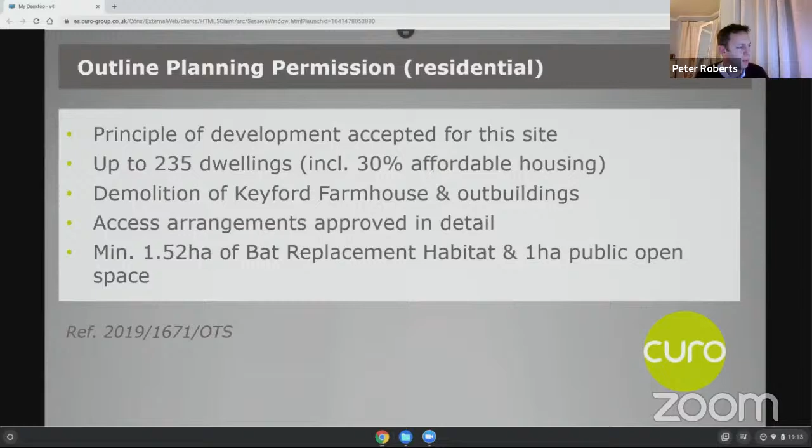In terms of our reserved matters, the original application was submitted in July 2021. The key elements of it remain unchanged - it's still for 198 new homes, including 30% affordable housing, and still for a mix of 1 and 2 bed apartments and 2 to 4 bed family homes.

It's still a lower density development than permitted through the outline - so 37 fewer homes than permitted through that outline planning permission.

You've just gone through reasons of concern that were expressed at the last meeting, so I won't reiterate those, but I'll come on to what we've done in response to those comments. We've taken a number of months to come back with a revised scheme. Over that period, we've been working quite closely with officers, and we've had significant feedback from the Civic Society, so we've really taken those comments on board, and they've influenced the revised proposals.

In terms of changes made, we've revised the elevations, we've revised the materials, we've provided additional information on levels, we've looked at the orientation of some plots around the northern basin in particular to improve overlooking, and we've enhanced the sustainability credentials of the scheme.

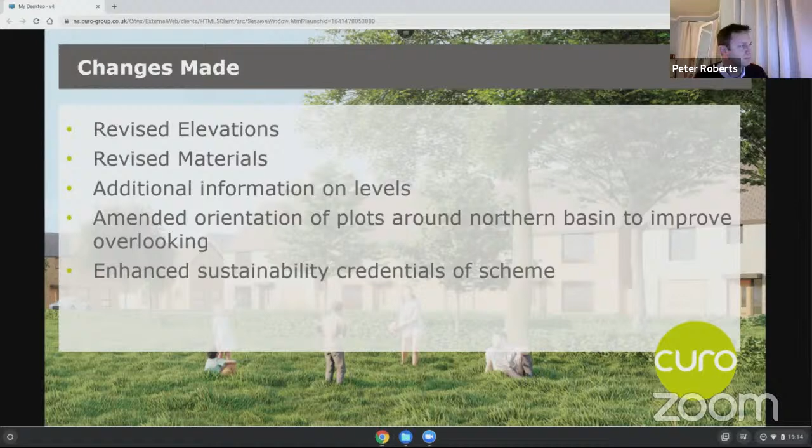Just in terms of the character, or the changes that we've made to the architectural treatment of the scheme, we've really gone back to basics, if you like, and I think Civic Society had a lot to say in terms of the architectural design of the scheme as originally submitted.

So we've gone back and looked again at the character of Frome, drawn out detailing - things like window surrounds, stone banding, courses, features such as dormer windows, canopies and entrances, and bay windows. We've looked again at the material palette, taking on board what others have said, and then the massing characteristics as well.

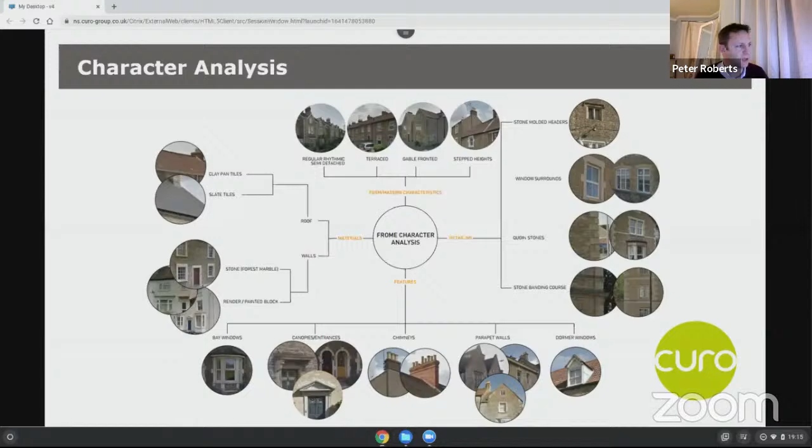Taking all of that on board, we've then re-looked at our proposals, and we've done a wholesale review of the houses that we've proposed and the apartments, in order to incorporate some of those features and reflect the local vernacular more directly. So we've introduced - and these are kind of working drawings, if you like, at this stage - just to show you the process that we've gone through.

So we've introduced the banding along the centre of some of the properties horizontally, in order to reflect the banding seen on some of the older properties. A big criticism from the Civic Society was the prevalence of projecting front gables, so we've really reduced that feature, or removed it from the vast majority of properties.

We've added in some painted render, again at the request of the Civic Society, and increased the window sizes, and introduced stone or reconstituted stone window surrounds and bay windows to some feature properties.

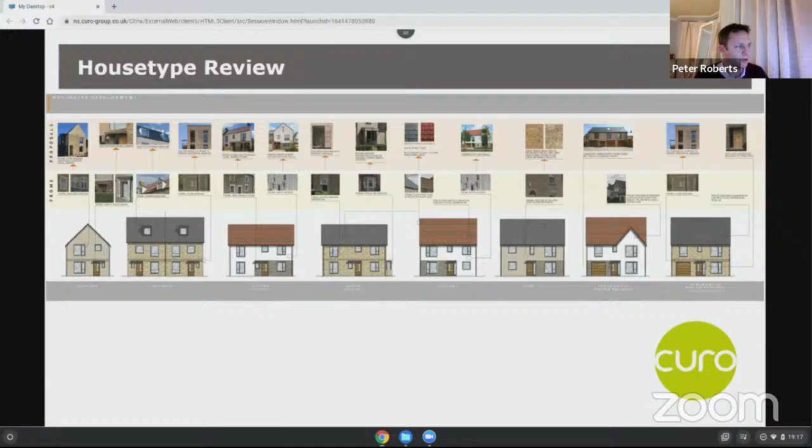We've done a similar exercise for the apartments, so again re-looked at the proportions of the fenestration in order to better reflect what's in Frome, introduced window surrounds, and introduced some reconstituted stone to reflect the forest marble that's seen in the local area.

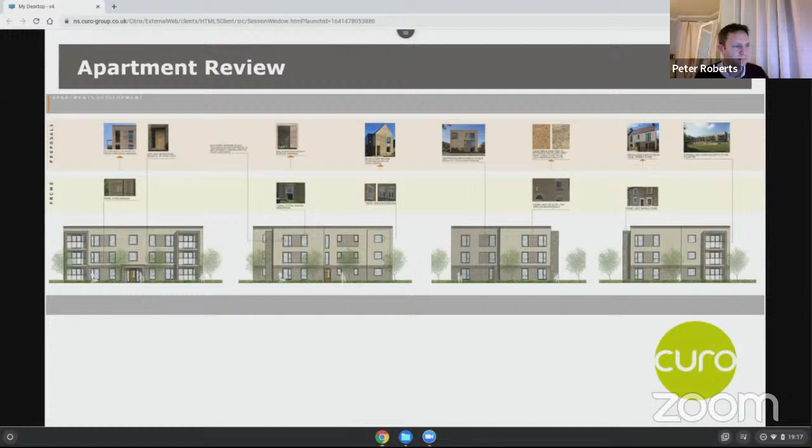So the key elements of the revised elevations: removal of most of the projecting gables, replacement dwellings have been designed with less focus on the roof form. We've increased the proportions of the windows in order to increase the amount of light in the houses, and as said, we've reviewed the local vernacular and amended the designs to reflect that local detailing.

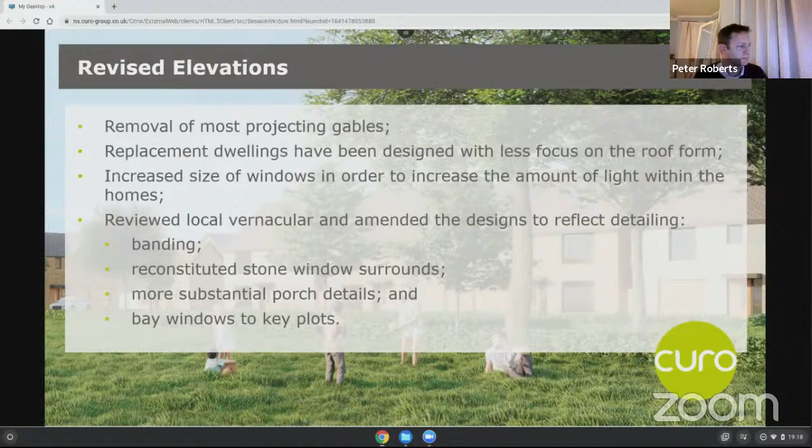In terms of the materials, previously we had an element of red brick within the scheme, which in particular the Civic Society weren't happy with. So our walling palette has now been changed to remove that - it now includes two buff bricks, reconstituted stone, and a kind of creamy render. We've also reduced the proportion of red tiles, and now propose a mix of grey and terracotta tiles.

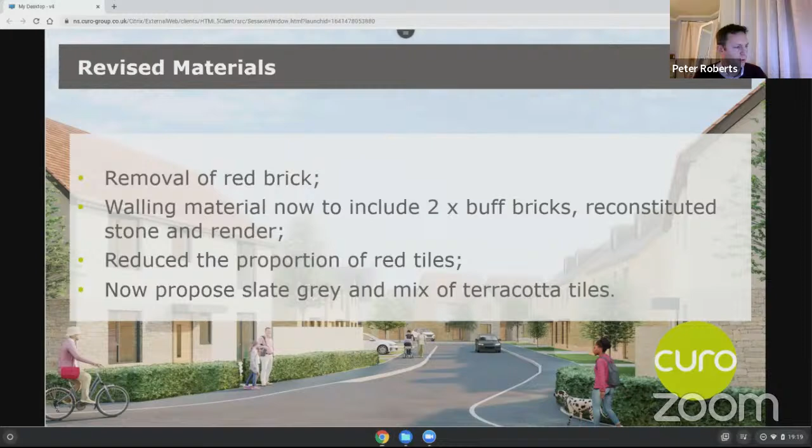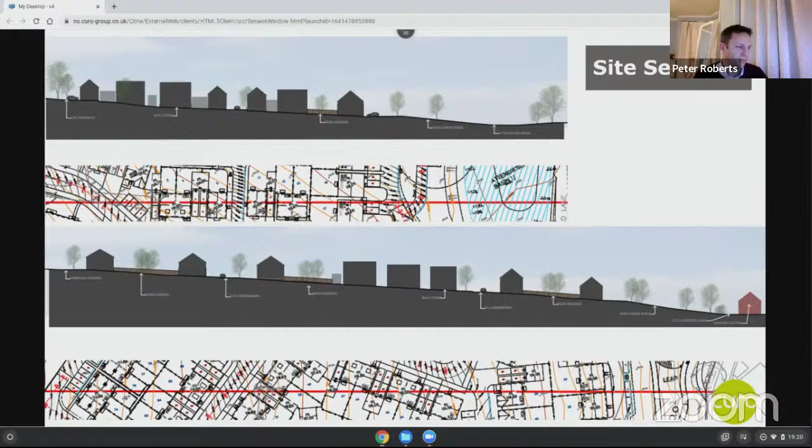Just in terms of the layout, it remains largely unchanged. There have been several changes where we've substituted plots, so gable fronted plots with non-gable fronted, and also around attenuation basin 3 in particular, we've reorientated some plots to improve the overlooking and outlook on that area.

But all those areas now have improved overlooking. Attenuation basin 2, which is tucked behind the farmhouses, is difficult to provide full overlooking of, because of the retention of the farmhouse included within our proposals. But there are several properties looking directly over that area.

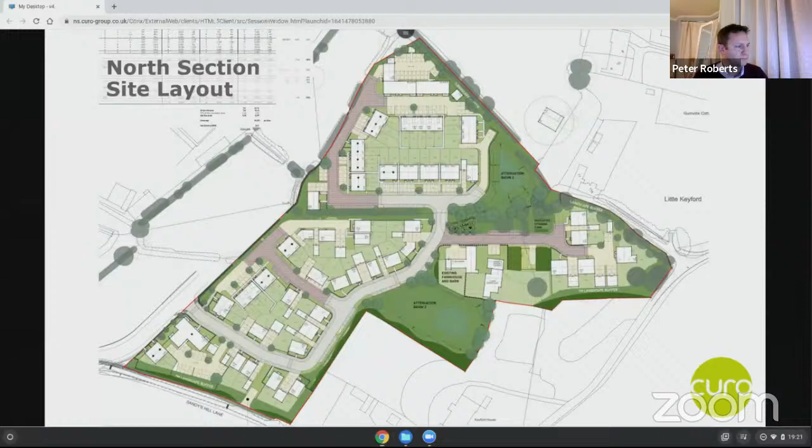And similar story to the south. There have been minor changes to the layout to incorporate the revised house types. But again, the basin and the leap is well overlooked by houses directly looking onto that.

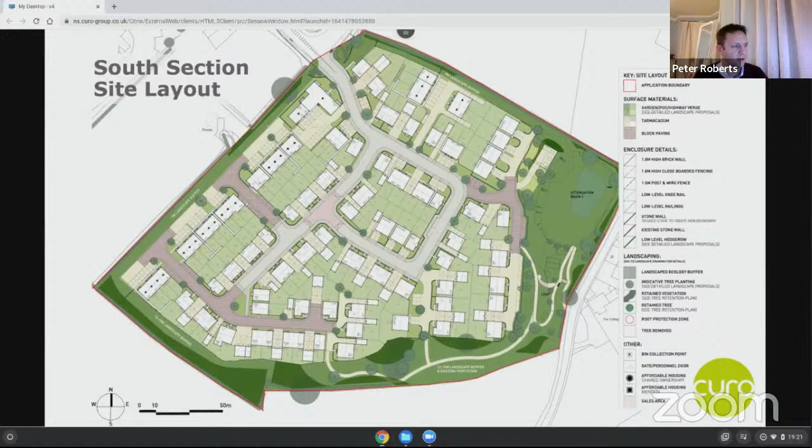And finally, I know that the key concern really was in relation to sustainability. So we've looked really hard at that in order to improve our offering. Our previous proposal included a 10% improvement against 2013 building regs. Our new proposal improves that significantly to a 41% improvement against 2013 building regs.

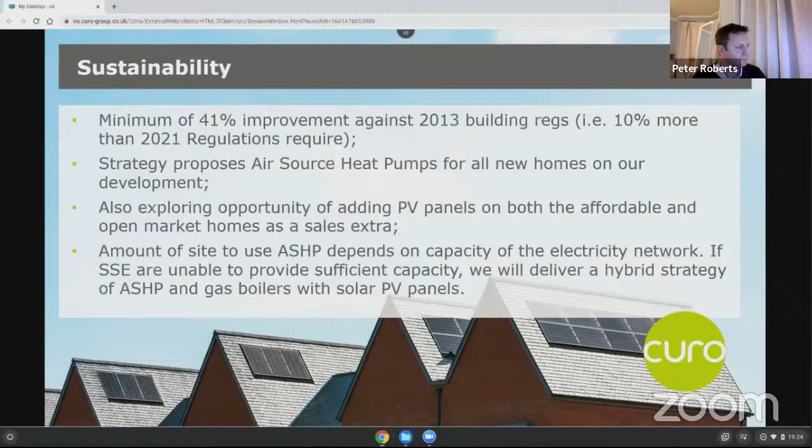So that's the end of the presentation. I'll hand over for questions.

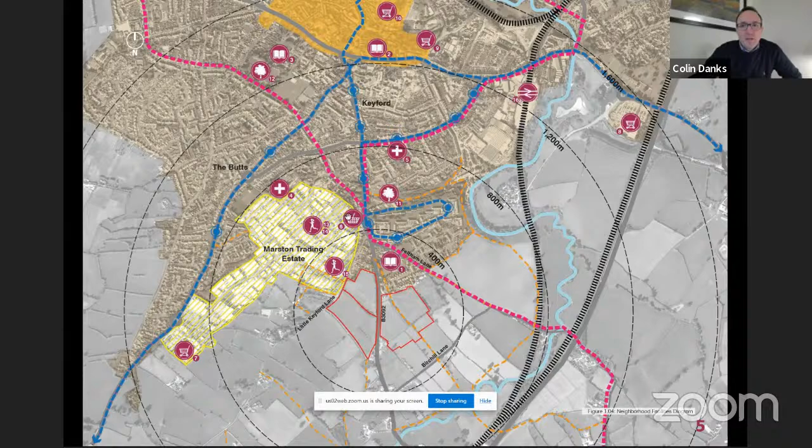I'll skip some pages, otherwise I'll be here all night with everybody. Right, let's just start with movement then. So we've looked at movement into the town, and we've got the National Cycle Network here, Feltham Lane, as you know, and we've got Little Keyford Lane, and then we've got the Mount. For reasons I'll come on to later, we are still of the view we shouldn't encourage use of the Mount, and I'll explain that in a little more technical detail, particularly in relation to this stretch here north of the site all the way up to where the co-op is.

So what we're trying to do within the site is create east-west movement to what are essentially very good connections into Frome. We'd also like to see Little Keyford Lane become much more of a recreational route, and as part of that, as you'll have seen from the application submitted, we intend for all 3 sites - and we've designed this in detail - to access themselves from the Mount, but we'd like to see good connectivity for cycles and pedestrians. So there are 2 connections here, one for each - this is the Wain Homes scheme, and this is our scheme - so a connection directly onto Little Keyford Lane, and a connection across the Mount.

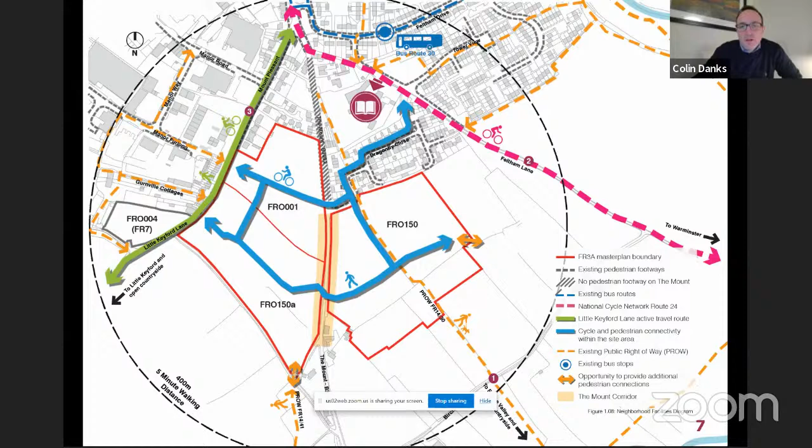I'll pass some of this because I think we've been through this. If we just move on, this is now into the bat habitat. From our assessment and reassessment, we've identified the areas where there is key bat habitat, and you can see that in the dark green here for all three of the sites.

The total need for bat habitat in the local plan was 1.31 hectares. That amounts on our site, previously known as 150 and 150A, to 0.58 of a hectare and 0.20 of a hectare. Our total provision is double on this scheme, so it's 1.1 hectares, and it's four times on this site, which is 0.8 of a hectare.

You can see what we've tried to do—we've tried to create connected networks. I do note, as of today, there was a response from Natural England raising some questions, but I think that's because we've had a change of officer, and they perhaps haven't understood that this has been through a very long process of debate and discussion about the amounts and how it was provided. So just to say, the bat habitat has been a key part of these proposals.

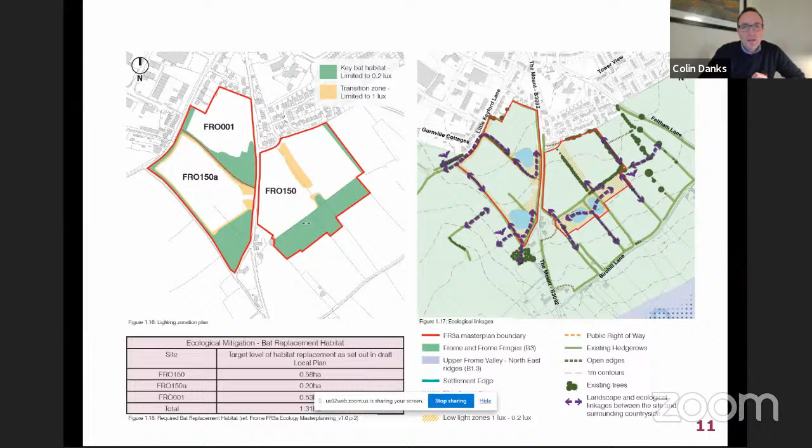Then we went through a process of understanding the place, and I think we've talked about this before, so we'll come on to the gateway now. We've talked about having to establish a gateway into Frome, and there's lots of different ways to do that. I think in our previous discussions, we've talked about a roundabout being a gateway, or that's been a suggestion.

We feel from an urban design perspective that a roundabout is very much a car-dominated approach to creating a gateway, and that would be the wrong thing to do here, when what we should be doing is, as shown in these slides, using our buildings to create pinch points, using our hedgerows and our change in surface treatments to the road, and our open spaces again to create those arrival points in a sense of a series of arrival points, which I'll come on to in a moment.

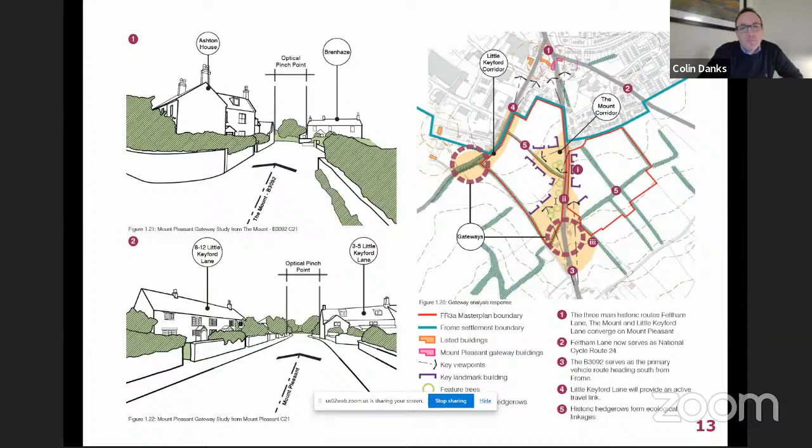So I'll just skip some of these. Where we arrived at was a broad master plan with development areas and then green infrastructure areas, all connected through. You have to bear with us, this is a master plan for all three sites.

We've discussed it with Wain Homes. They are amenable to the proposals and accessing their site off the mount, but of course that is their planning application, so we will be reliant on others to effect a change there were that appropriate, but we can prove that certainly the accesses work.

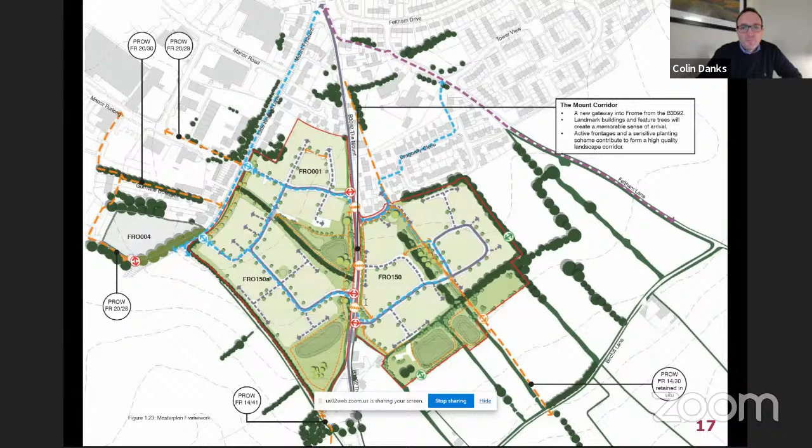So if I just skip some of these slides. In terms of density, the overall density—bearing in mind we're not trying to create suburbia here, we are trying to create something which is more akin to the town—we're at a density of 43 dwellings per hectare, which is a modest density appropriate to a town. It's not central town, but equally it's not suburban either.

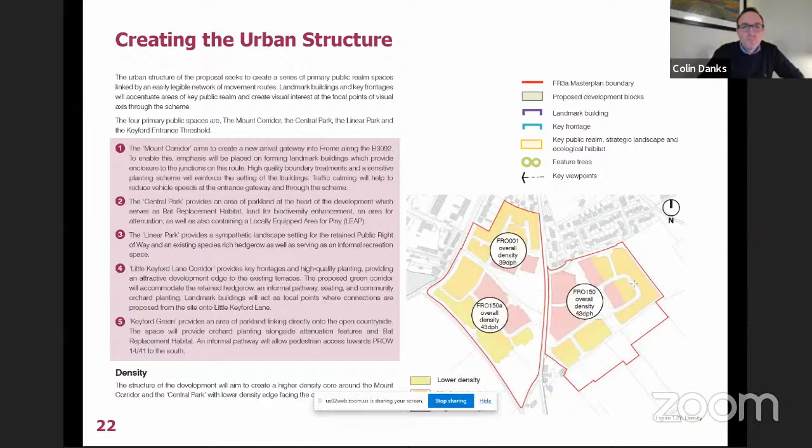And that comes across in the design and structure of the houses, which is changed on the detailed aspect, which is this scheme. So just talking about the arrival points.

Apart from the traffic proposals, the road-based proposals, our arrival points really are in this area here. So there's an element of traffic calming, which we'll come on to, but it's also about having landmark buildings facing out, about having an opening of space into here, about having a pinch point across here, and then about continuing that strong built line, albeit slightly set back from the mount. Nevertheless, it's very clear you've transitioned from what is open countryside here into a more urban setting here.

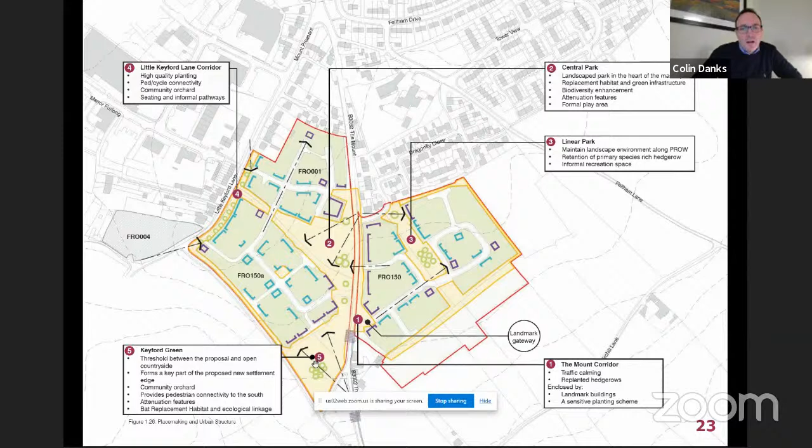We're also using linear park on the left-hand side as well, so you've got some setbacks, some softness to this. I'll talk a little bit more about the details of that in a moment.

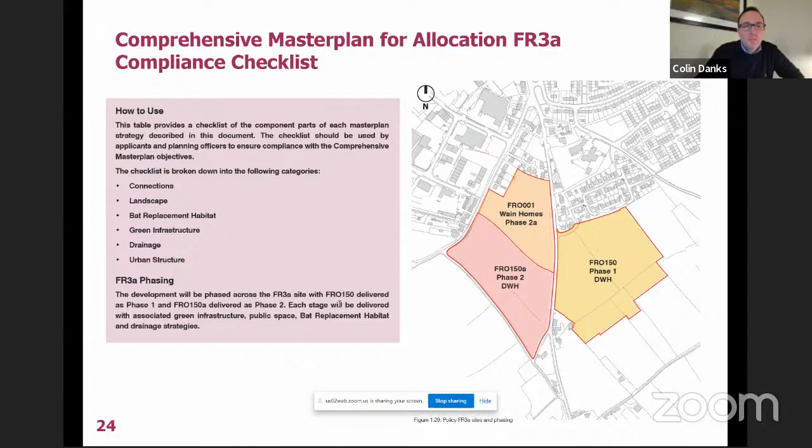I won't go through the compliance checklist, but suffice to say, there's an explanation in the planning application. I'm just going to skip slides.

Let me just move on, so in terms of surface water and drainage, this is probably a good slide to use. The question we were asked is, are we comprehensive in our approach to dealing with surface water? Looking at sustainability as a key criteria, the best way to manage surface water is to try and use it in a dual way and use it to the benefit of ecology as well.

Which is what we have done here and here with our proposals. They're in these positions, so these are swales running through the site, which draw water down into these then attenuation basins. They're largely dry with obviously an increasing level of water in there in what's potentially a flood event. They're designed to the appropriate climate change levels.

So from a storage point of view, they're the appropriate size for the level of development. They're also, from an ecology point of view, very good for the bat population because they attract insects, and that's then good for bats and their foraging. So that's why they're positioned where they are. If you notice on the previous slide, they're in the bat corridors that we're creating as bat habitat.

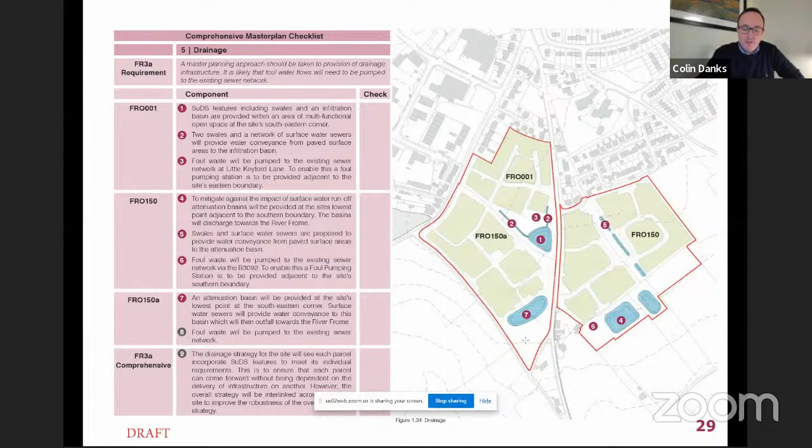Right, I'm just going to stop sharing this document a moment, and then I'm just going to share another screen now. So if I just move on to the detailed design, and I'll come back to the mount as a completely separate exercise, if that's okay.

So what have we done in terms of responding to civic society and yourselves and the comments raised? There's an introduction of terracing through parts of the site. Not all of the site, because again, you'd like to try and get a mixture of dwellings within a site, and that's appropriate to different needs of different groups of people.

So we've got semi-detached dwellings here, but you see that the terracing is focused quite principally along the mount, and again it's about creating that sense of gateway arrival.

We've also talked about the cycle link. So there's a cycle, and I heard in the last discussion, this is a combined cycle pedestrian link, but it's a wide link through here. We are using our estate roads in part because they should be calm; they're designed for low speeds. We shouldn't be entirely segregating the cyclist. I firmly believe that in appropriate locations you can have cyclists on roads, and likewise affecting the link.

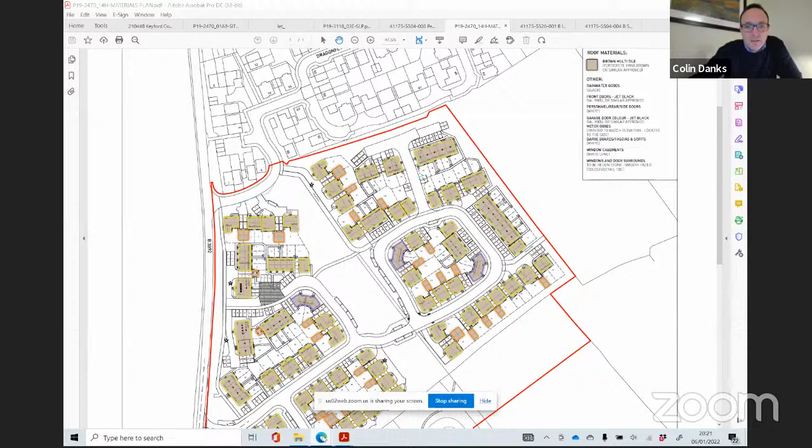I'm going to go back and try to share another screen here. Bear with me. What I'd like to do is talk about this connection here, which is a footpath connection that goes up past the back of the school. Could somebody confirm they can see this okay? Yes, brilliant, thank you.

We asked Stantec to do a full technical assessment of the B3092, from approximately here all the way up to the co-op. If I can just go through the issues we found, which explains the approach we've taken. So there's a stile here, a public right of way up to this point, and it drops you out onto the B3092, the Mount.

No footpaths. The issue we have at this point is no footpaths, private ownership immediately on the boundary here. If I just move up a little, this is in private ownership. Albeit people do use that, we've also got residents, a dwelling house here and garden.

As we move up through here, this wall has been increased in height. We have a driveway here, and a driveway here.

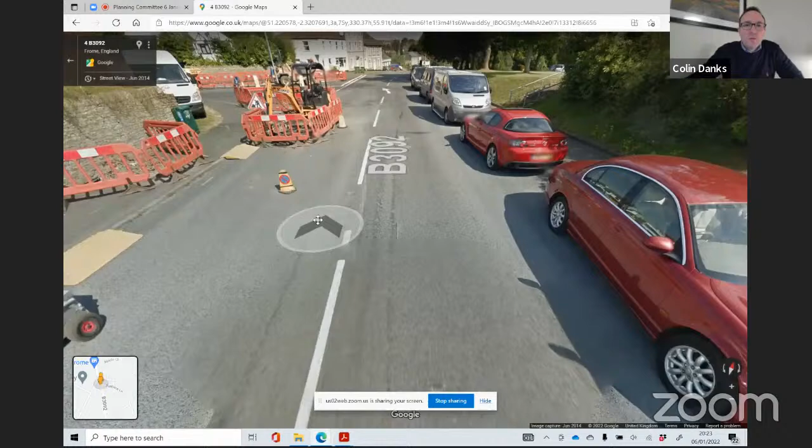It says no entry, it says it's a dead end, but it actually does continue through, and there's a couple of properties served off it. And then we get to a footway. If I just keep going a moment and look back now, and obviously there's into the co-op.

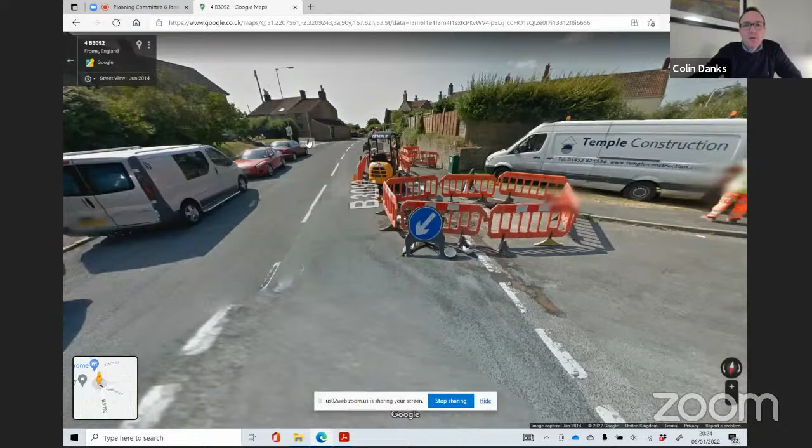What we would have to do, because of the ownerships and the walls, is create a one-way system from approximately where this car is parked, all the way down, past here to approximately somewhere about here. The total length of that one-way section is between 80 odd and 90 odd meters, depending on what option you might choose.

So you'd have to have a shuttle system where you closed one full carriageway running all the way through there. That is one solution, but there are problems still with that solution which we can't solve. We debated long and hard whether it would be appropriate to pursue that.

So you're putting pedestrians out onto here. Imagine if you had a refuge on this side of the B3092. That is effectively a build out - hopefully this is keeping up - a build out which runs all the way up to this car here.

The issue we have with that build out is conflicts with the existing residents. If you've got a pedestrian walking up the B3092, at this point they would be on a pedestrian refuge here, and they can't see anybody coming in and out of that drive. You've then got cars here which will need to still be given the opportunity to park here, so again you've got conflict with cars crossing.

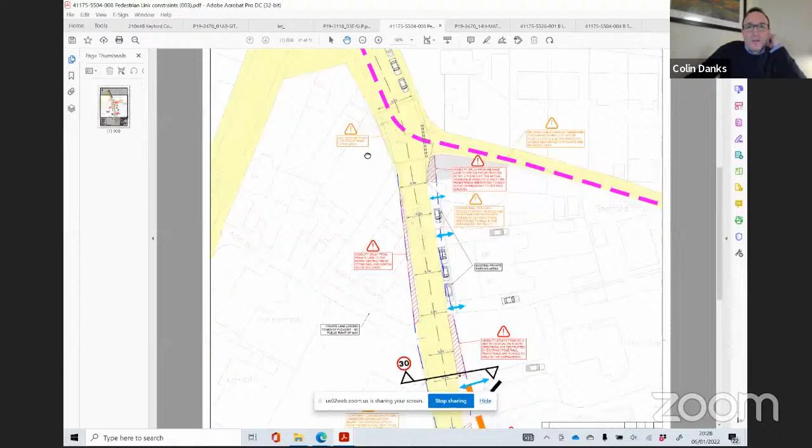So where we got to, I'm just going to show you a plan. If you can all see this plan, these were the issues that we looked at, so you can see we've done it as a full technical drawing.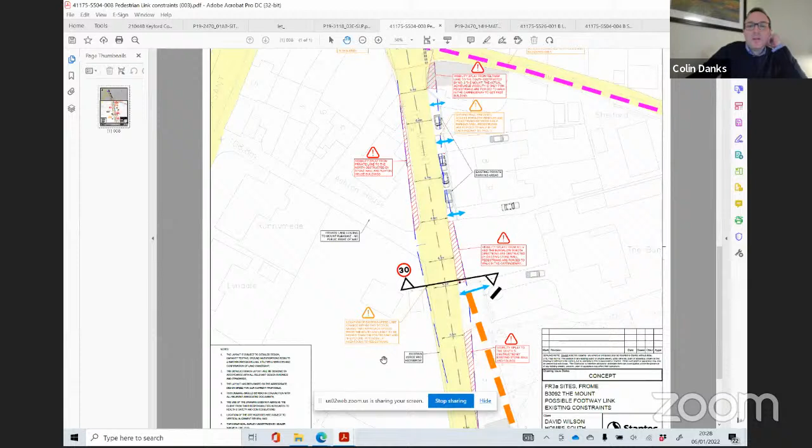We've looked at, as I say, putting a refuge from here all the way down to here. But we just don't believe, because of each of these issues that I've tried to show, that's safe. What does this mean for us?

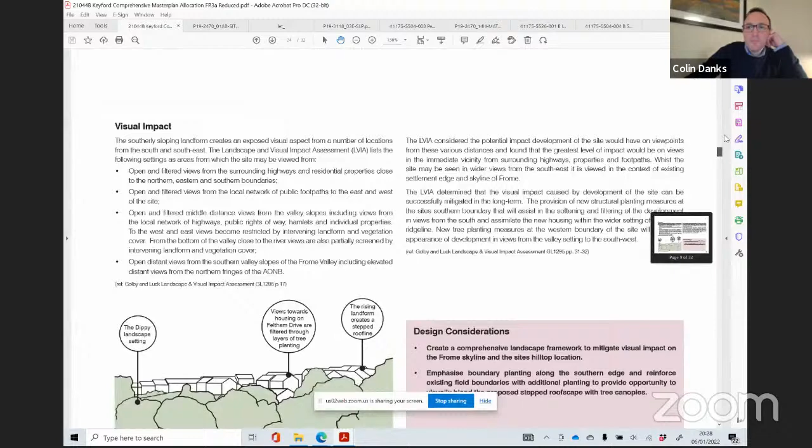Well, if I can just go back to this document, we looked at what the impact is on the residents that would move into this development. Using, I may just zoom in.

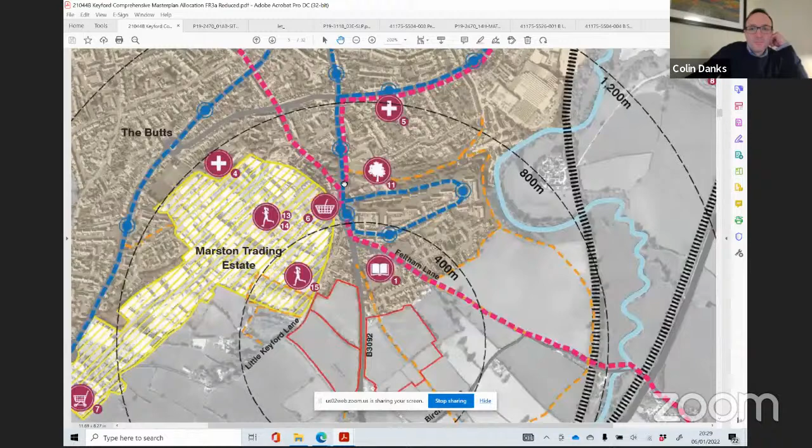Using this footpath, the Mount, to get to the shop takes 3 minutes. Using this development, Dragonfly Close and Feltham Lane, takes 4 minutes. Using this, crossing the B3092 and using Little Keyford Lane, takes 5 minutes. So those are the magnitudes of change we're talking about in terms of walkable distances, all measured at the same pace and the same approach.

So we really feel that trying to make this better is actually trying to encourage people to use a solution which is more than suboptimal. So we've concluded we don't want to pursue that because we don't feel that's appropriate, and we should really still be encouraging people to use Little Keyford Lane.

If we've got the Wayne Homes access away from Little Keyford Lane onto the Mount, we can start to really have a nice pedestrian route through there, again using Feltham Lane and the residential streets, which are good streets, part of secure by design, part of vitality and of settlement. It's all about having pedestrians on streets, so we'd really like to encourage that.

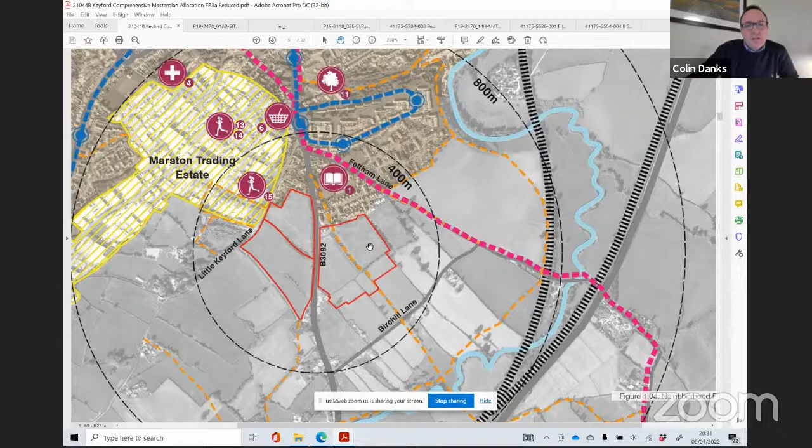In terms of sustainability, and then I'm done, we looked at carbon impact, and we've taken on board the discussion about solar panels, so every house will be fitted with solar panels. I noticed some comments online saying houses will only be made ready. No, that's incorrect. They'll be fitted with solar panels.

In terms of gas boilers, I heard the discussion earlier, no intention to repeat that. We have the same issues that Curo have. What I would say is that we are still in that transition period. It might be that whilst Keyford might be solar and gas boiler, Little Keyford things might have moved on from there.

I heard the discussion about ground source heat pumps. Ground source is very difficult to make work on a housing scheme of any scale, and the reason is because it freezes the ground. You either go for a borehole, which freezes the ground around it and you've got to repeatedly bore 25-metre deep boreholes every few years, or you lay it out on a sheet and there's just not enough room on a housing scheme for ground source.

So that's why you don't go down that route. Air source is a little easier, but as Curo mentioned, it's a very expensive option, which is why we have gone fabric first and solar PV. I hope that answers as many of the questions as I had notes on, but if you've got more, please do raise them now. Thank you for the time.

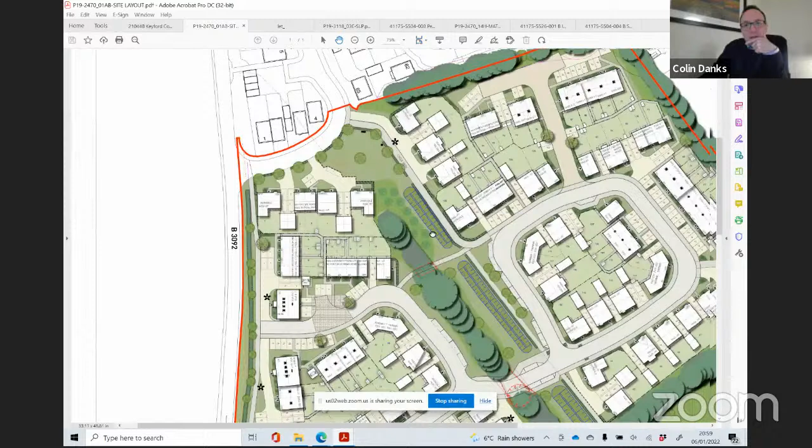That route would be a lovely pedestrian route, and then a cycle route up through, and then out. So just to clarify, that cycle route you marked out - yes, and then down to... so this is the cycle route, the footpath, which is not the road. If I zoom in a little bit, the straight bit you said would not be lit - so this is cycle path through here, and then this is footpath through here. And then there's footpath connections across here.

I just wanted to pick up on something you mentioned about facing or not facing. There is a footpath running all the way through here, which connects into Dragonfly Close. So there's a natural desire line here - you get to here, you naturally pick up the Dragonfly Close access.

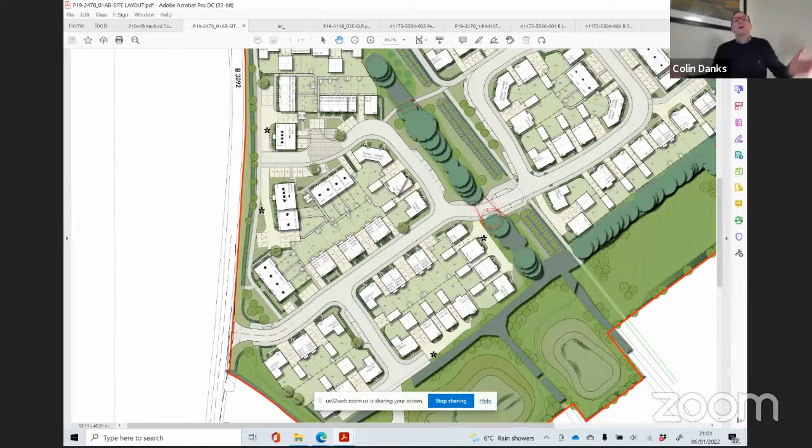We felt it was important to face, because if you go to any settlement now and look at a 1980s settlement, the traditional way was to back onto the road, and then you get these faceless entrances to towns. Yate in South Gloucestershire is a classic example of the Radburn layout, which has benefits for pedestrians but is terrible in terms of secure by design and its aesthetic. So we are trying to create perimeter blocks here, where your private space is on the inside of the perimeter block and your public space is on the outside, and that's why we faced out.

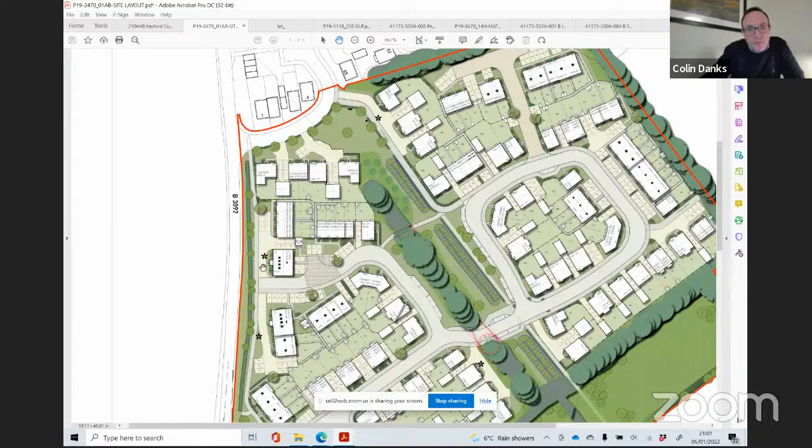Can you just scroll up so I can follow that line of that path? Yeah, so it runs all the way up here, all the way up behind there, and then collects into Dragonfly Close, running through there. So you've got these - that desire line is really strong, though, isn't it? It is, and this one here, it is absolutely. There will be people that will try and use that, absolutely.

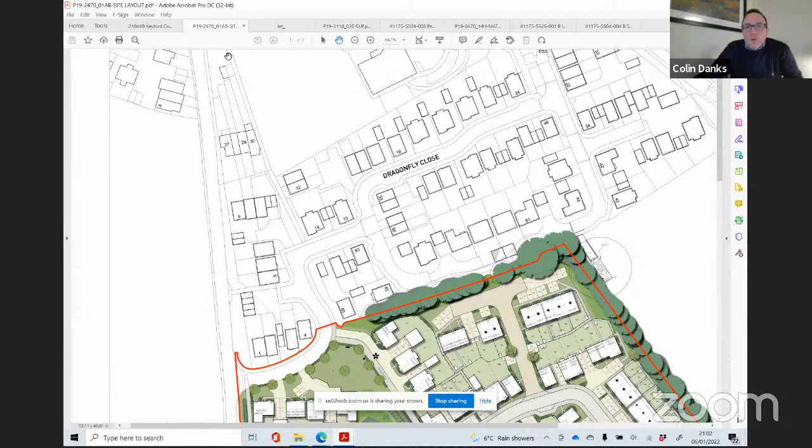But should we be encouraging use of it by making it that little bit better so more people use it, or should we be keeping it to a minimum? I think we kept coming back to, we really should be discouraging it. There are stiles at the other end - the more you do to that, the more people use it. So there's balances both ways. We can't affect a solution which is...

Appropriate. The daft thing is, it wouldn't even be a particularly costly solution. If you could do it in the highway, it'd be great, but there's too much conflict. We've had two highway engineers look at it, two separate highway engineers.

Building regs, sorry, last question. I can't tell you where we're at in terms of the new building regs, but I can tell you we will exceed - I believe the whole site is being designed to the new building regs. How far they're exceeded, I don't have an answer to, but I can find out. Certainly with the PVs and the additionality there, we will be exceeding it. From a fabric first point of view, it will be meeting the requirements of the new building regs. Okay, I wouldn't call that a fabric first approach - I'd call that a compliance first approach, but we'll save that for a rainy day.

The development, some of the development could be put under the existing ones, yeah. Okay, according to the design and access statement, Colin, it misses by quite a...

Oh, I think I've lost you. Is everyone still there? Yeah, I think we just lost Steve. Froze, sorry, that was me freezing. I'll turn my video off. I don't know what you got.